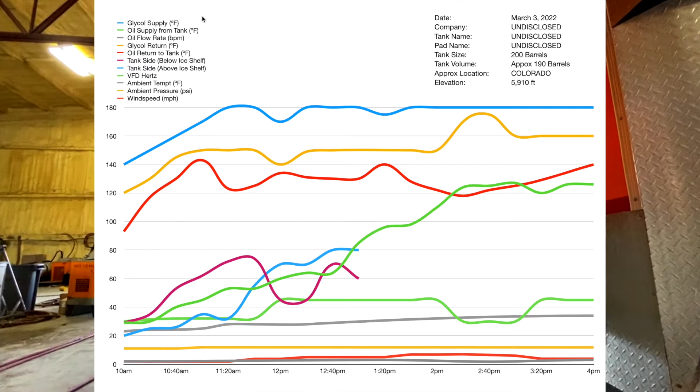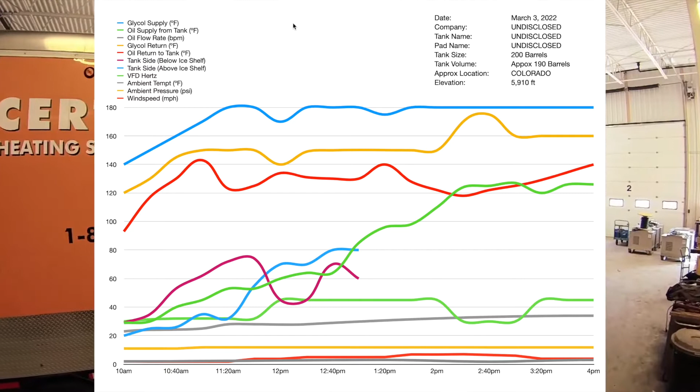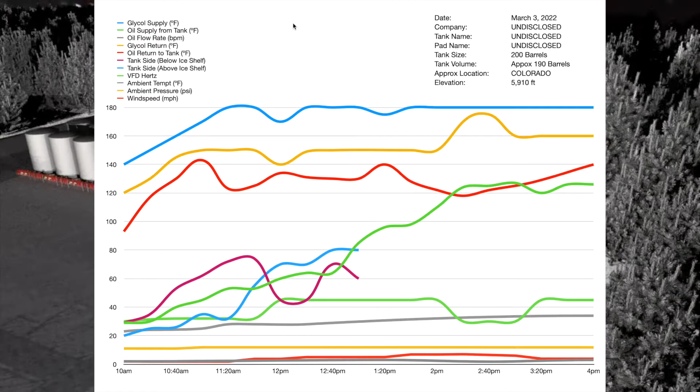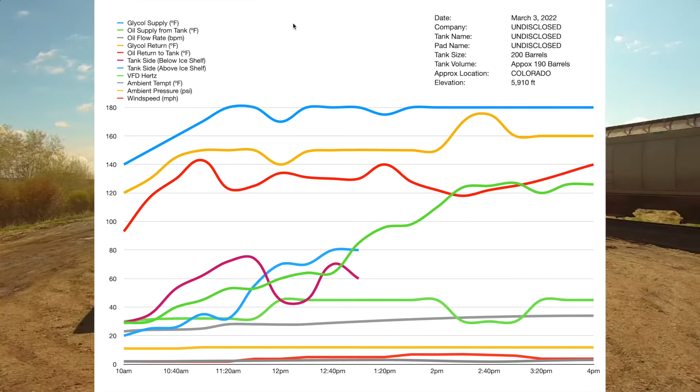This is a graph of one of our more recent hot oiling jobs we performed for a customer. Hot oiling is not what you think—we don't have hot oilers. We have glycol hydronic heaters, much safer, much more efficient. We call this process hot oiling because customers bring us in all around the country and in Canada to heat oil to do one of several things: thin it out, release gases, separate particulates from it, sometimes just getting rid of ice shelves caught in the bottom of these tanks—all associated with getting it to market so they can fetch a higher price.

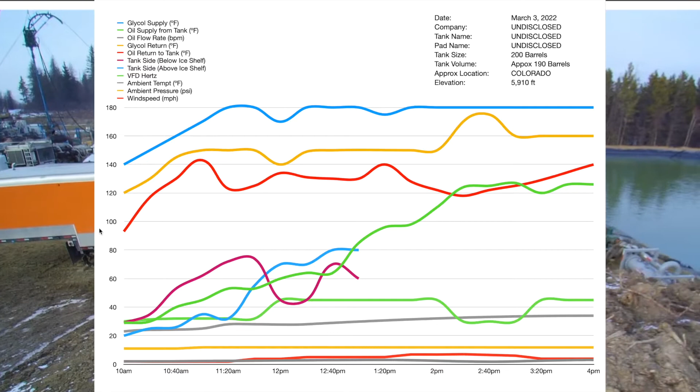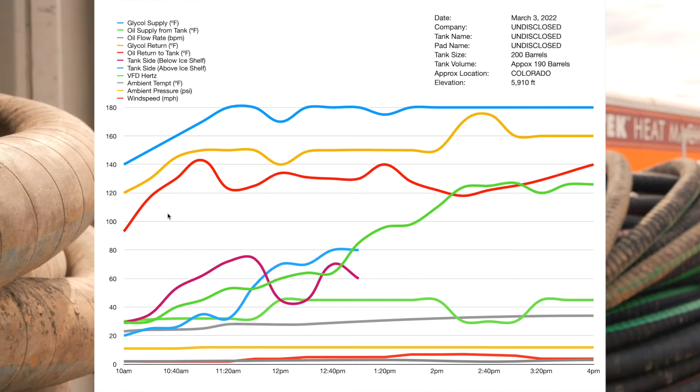Now this is something that we provide to all of our customers. This is just a graph of how our heating goes, and this doesn't necessarily help them with the sale, but a lot of times the pumpers and supervisors like to see this data so they can better schedule and see how our process works, and we like it too. This helps us determine if we're at high altitude, if the wind is going to be heavy, if it's going to be cold. All that affects your ability to heat exchange and how fast it's going to go, so you can schedule accordingly.

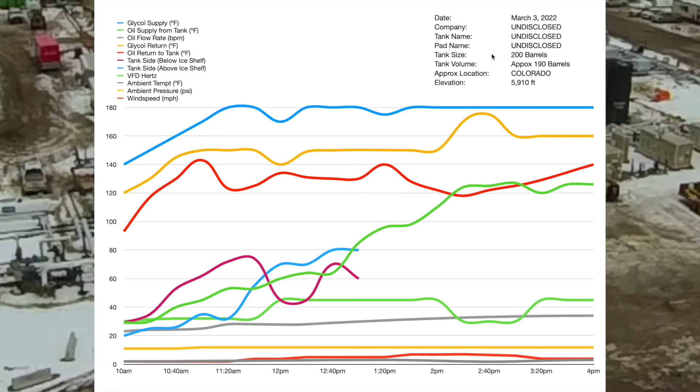So we're looking at this, and since we supply this to our customers, it struck me that maybe I should put these online and let others see how this goes. Of course, you're not going to see who this was for, or the tank name, or any of that. This was a 200 barrel tank, pretty much full. This was in Colorado, almost at 6,000 feet.

A lot of these will look a lot cleaner—this one's a little anomalous, and we'll get into why that is. But the most important thing you're always looking at when heating a tank is this: where is the oil supply from tank. So I'll go over these real quick.

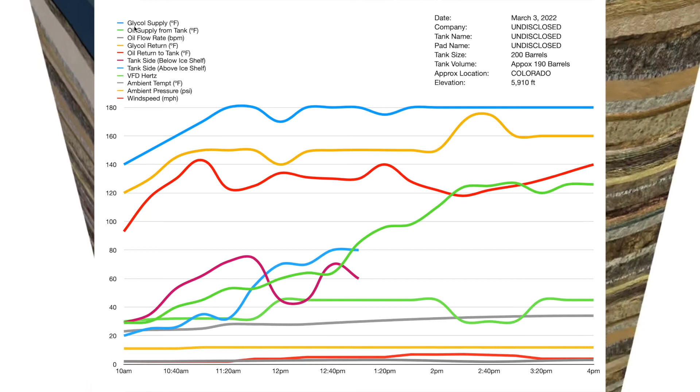What we're looking at is we use a heat exchange process. We use propylene glycol, food grade glycol—you could drink the stuff, tastes terrible, don't recommend it. So glycol supply, that's the glycol as it's coming out of our system. Our system, we like to top it out right around 180 degrees. So when you're running full bore, you're going to be right around 180. You're going to watch for this line right here.

Oil supply from the tank—that's the oil as you're getting it from the tank. Of course, as it starts out, it's going to be very cold, typically below the freezing point of water, though oil is still liquid at that point. That's actually the main one to watch, because we'll also look at our oil supply or return to the tank, which is coming right out of our system and will be hot. But you want to see this oil supply from the tank, because when that starts being hot, then you know you are reaching the temperatures you want in the tank.

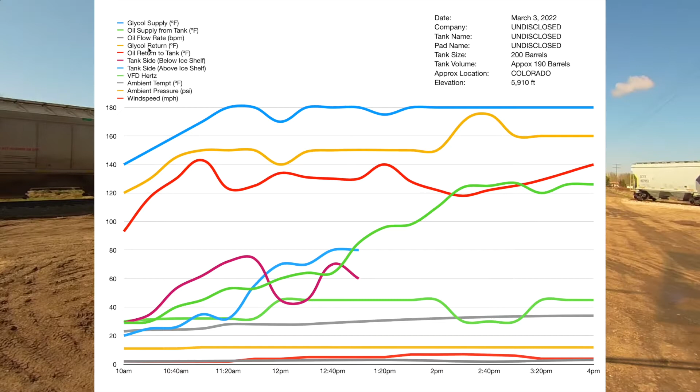Oil flow rate, that's basically how fast we're moving it through our heat exchanger. Usually we go up to about 4 barrels a minute topping out, but we don't usually need to run it that fast. Glycol return, that's our glycol supply imparting heat to the oil, and we're measuring what it's returning back at. Oil return to the tank, that's the oil we've just heated seconds ago, and it's going into the tank at what temperature.

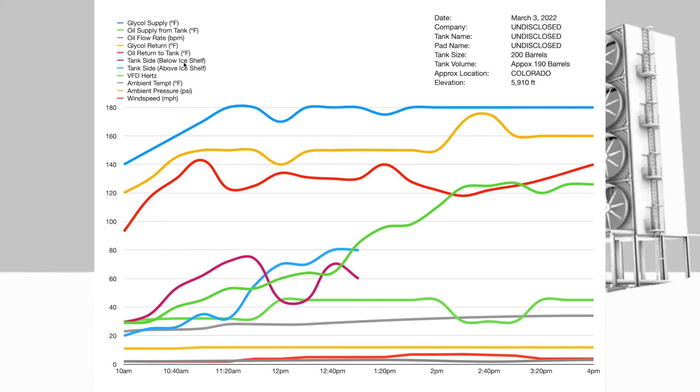Tank side, that's something new on this chart—we haven't really been charting that up till this point. That's a little crazy, and it's because there was an ice shelf. So we're actually trying to measure and gauge below this ice shelf, which is where our oil is going, because that's where the return valve is. Above this ice shelf creates a barrier, so if you can't get through that ice shelf of water, you're going to be reading two different temperatures. That's why we're measuring that.

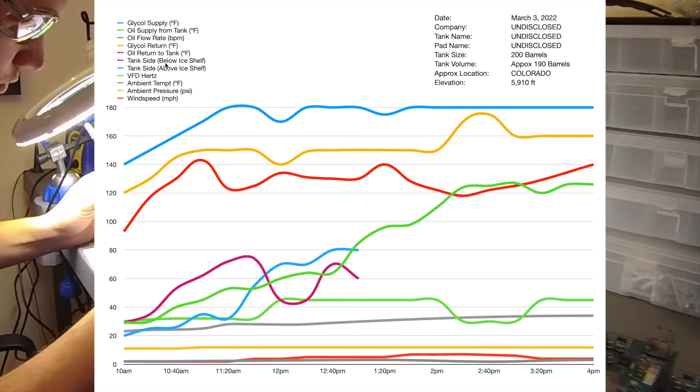VFD hertz. That's just a VFD that controls our pump through a heat exchanger, so that correlates to our flow rate.

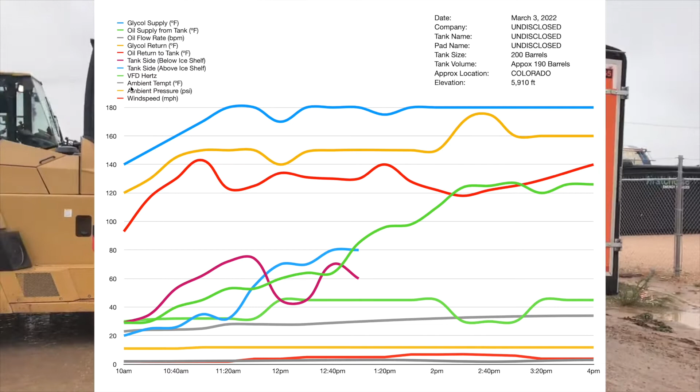Ambient temperature outside. These tanks are insulated, though I don't know the R value of the insulation off hand, that's something I should find out from our clients. Ambient temperature, if it's really cold, might affect it, but it's just something we like to gauge, especially if it's been warm out, like heating in the summer, which we often do, it takes less time and less energy. If it's winter and you're starting out below 20 degrees, it takes a bit more time.

Ambient pressure affects our unit since we're dealing with liquids and heat. We're at about 6,000 feet, so not too high. We run this office in Grand Junction, Colorado, which is about 4,500 feet anyway. And then wind speed, again with an insulated tank it doesn't affect it too much, but it's something we like to track.

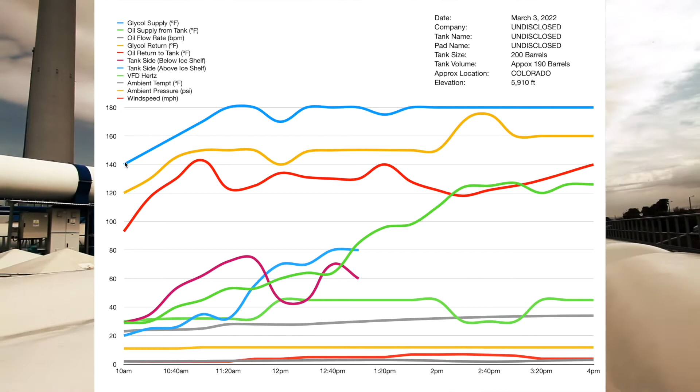So, starting out, glycol supply. So you're seeing it, we're starting. We already have this unit prepped and heating before we set up and before we really break circulation. So we're at 140. Now, of course, if you're starting the heater cold, it's going to be a lot less than that, but we're starting at 140 by the time we hook into this tank.

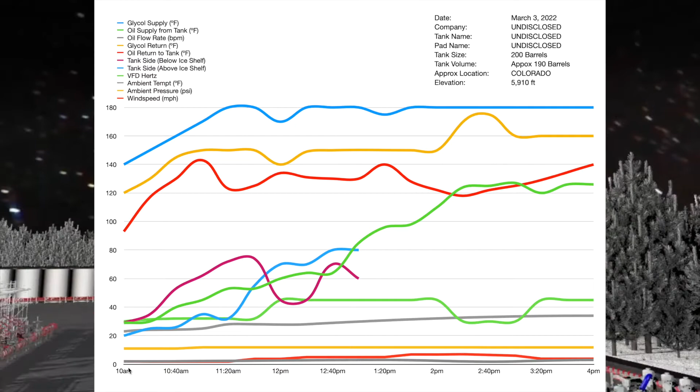You can see we're measuring at 20-minute increments. This went from about 10 to 4, a little longer than we had expected, because originally we were just going to get this tank up to 90 degrees. You can see it gets a little funky right around here - that's because when the pumper came and checked it, we got to that temperature.

So here's the oil supply, you can see it's climbing with the glycol. Now right around here is when I think we had this ice shelf that we were dealing with fall, and so it fell into our oil. We see a little bit of a dip right there, but then it starts climbing again.

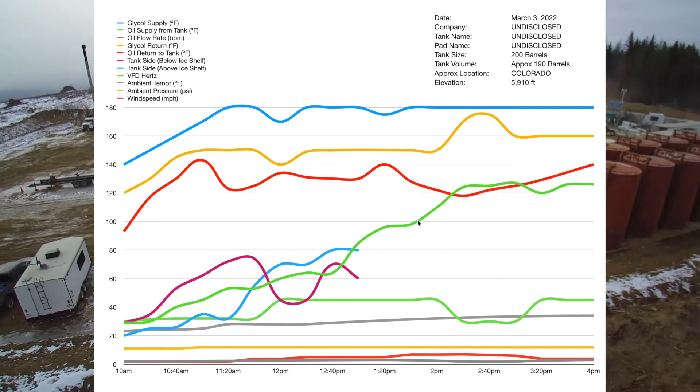We wanted to get to 90 degrees, so we're right here and we're holding. We were probably about to shut down, but we've got the pumper coming and checking. They liked the temperature, but this is when they hadn't been using this tank quite a bit, so he wasn't that familiar with it. When he took a look at it, there was just tons of scaling from the bottom of the tank, lots of sludge, so he asked if we would pump it up to 125, which you can see.

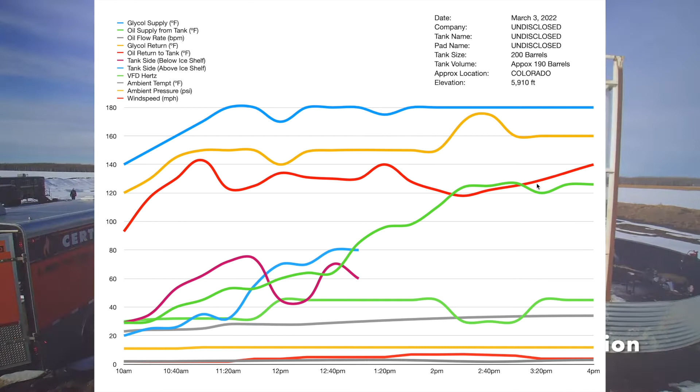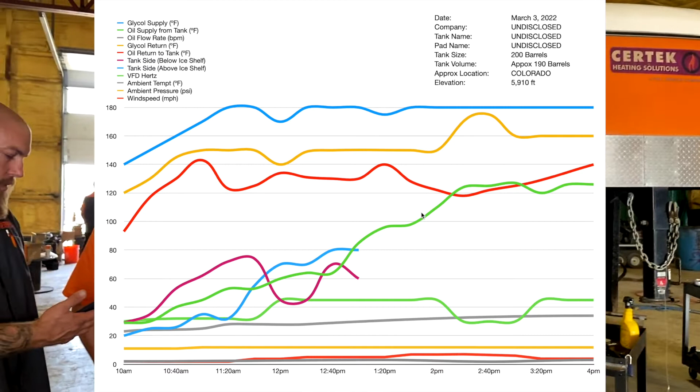So we stayed and did that, and he also asked if we could switch the load and return hoses, because their load valve was ending up getting filled with a lot of that scaling, as it was all kind of getting sucked to that one spot. So we switched that, and we'll get into that in a second. That's where you can see our VFD drop, and we brought it back because we shut our system down for that process.

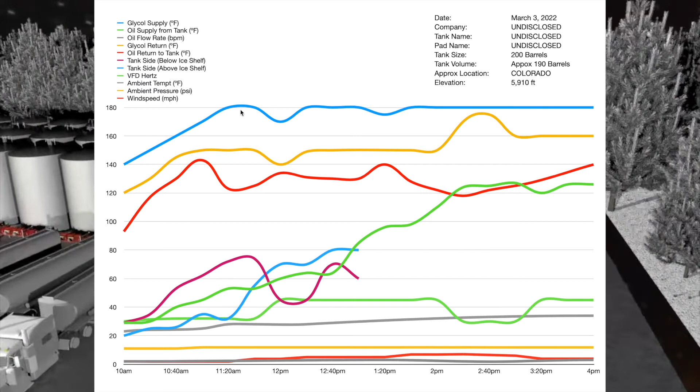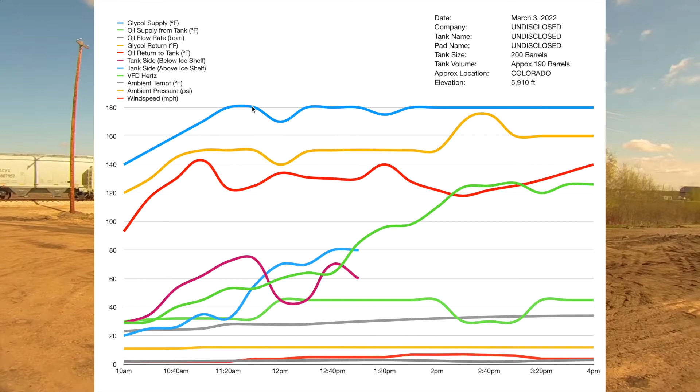So this is going, I want to help you understand these dips right here. Our glycol's getting up to temperature, hits 180, hits high fire temp. Now we have an automatic thermostat on it, so you can set that to whatever you want, but we've got it set to our highest at 180. When it hits that, it hangs out there for a while and actually turns off. So you see this little dip, goes down to maybe 170 at this point, and then it comes back on, goes back to 180, sits for a while, dips, back to 180, and sits there for a while.

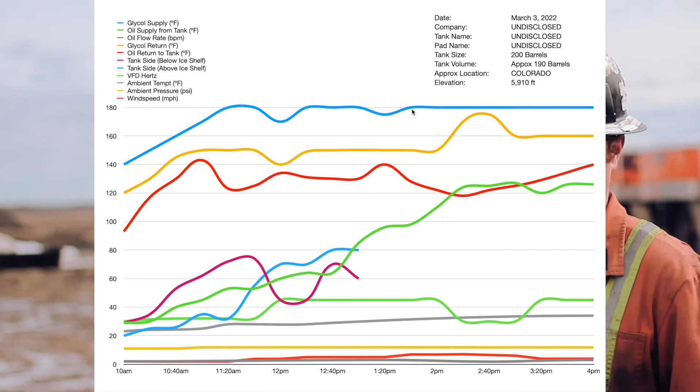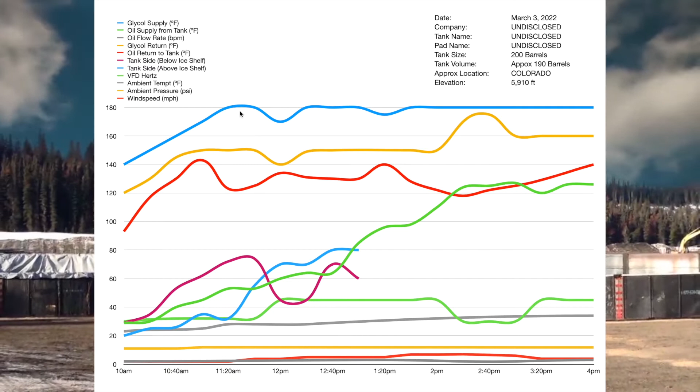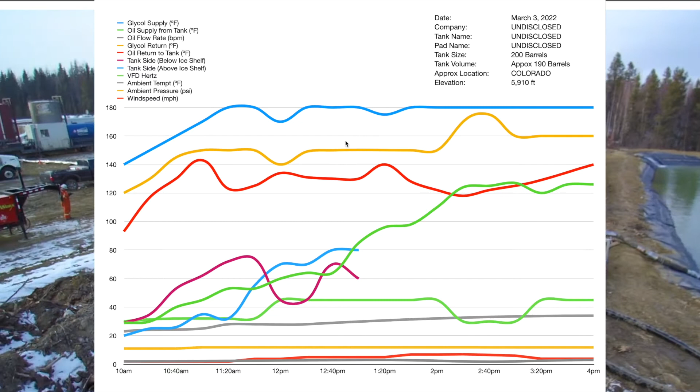Now that is really just how our system works - you set it, they're designed to set it and forget it. So for these processes, because they're only a few hours long, we do have a technician on hand the whole time. But when we're doing heat trace, things like that, where they're going to sit for months, you can set these and forget them. As long as they're fueled up and you're taking care of the generator and stuff, they just run, and they'll do this all day and keep you thawed out.

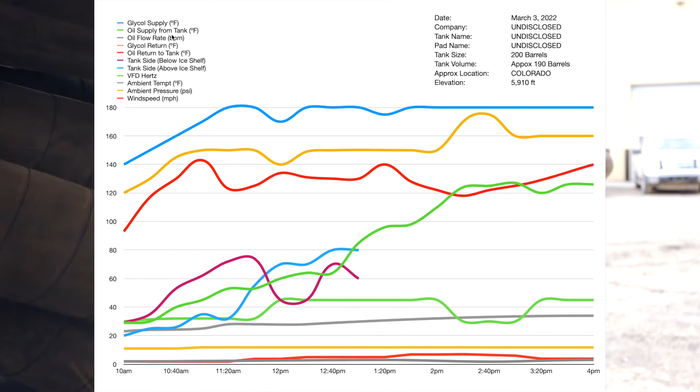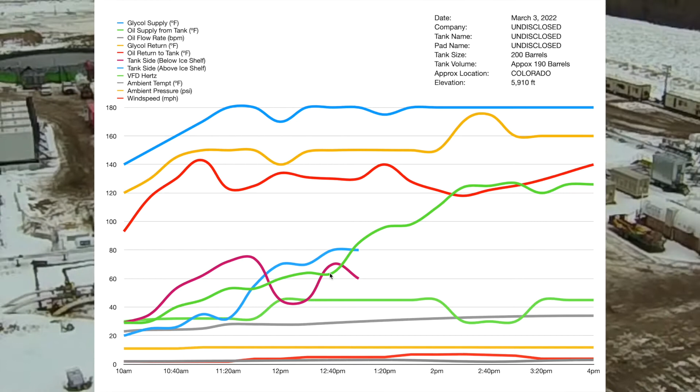Next, oil supply from the tank. We kind of talked about that a little bit. So we're starting out pretty cold, maybe right around freezing, 30 degrees. But quickly we start climbing. Sometimes it doesn't climb that quickly. Here's where I think we hit that ice shelf. I think it dumped in, so we got some of that cold water with it for a little bit, where we dip down a little. But then we just start climbing again.

You can see our glycol supply is pretty much staying constant right here, but we're still just climbing as we're adding heat. And then we are topping this guy out right around where they're asking 125.

I think we got up to 127. Dips for a little bit here, not quite sure why it dips right there, but then we get right back to there. Sometimes you just get anomalous readings.

And that is really the most important line, because that's where when you consistently are getting oil from the tank at the temperature you want, you know you are circulating that entire tank and you're at where you're at.

Oil flow rate. Now that correlates, like I said, with the VFD hertz. So down here, I think this is it. This would be it. It's really smooth. We're just running at 2-3 barrels a minute. And that's really all you need.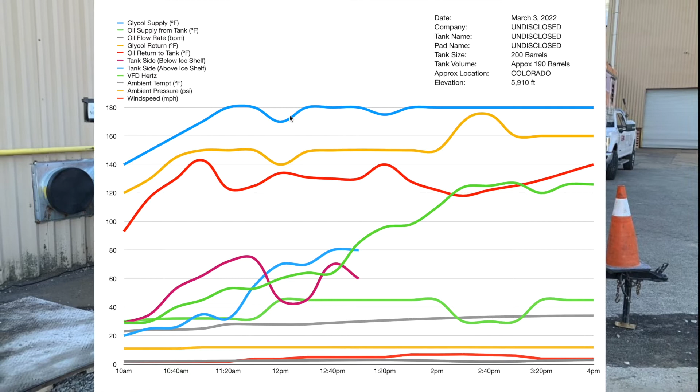Glycol return. Now that's this guy. So this is always going to be a little bit lower. So you always want to be, you don't want to be less than 170, because that's kind of that dip here on your glycol supply. If you're going lower than 170, it means maybe your unit's locked out, you need to turn it back on.

Or something like that. This, you don't really want to be less than, say, 130 while you're doing this. There's always going to be this little gap, and they kind of correlate as you see.

So this is climbing. So as we're imparting heat, we're losing that glycol heat and it's dropping down. So it's at 120 when we're starting. But it climbs as this climbs, climbing up to probably

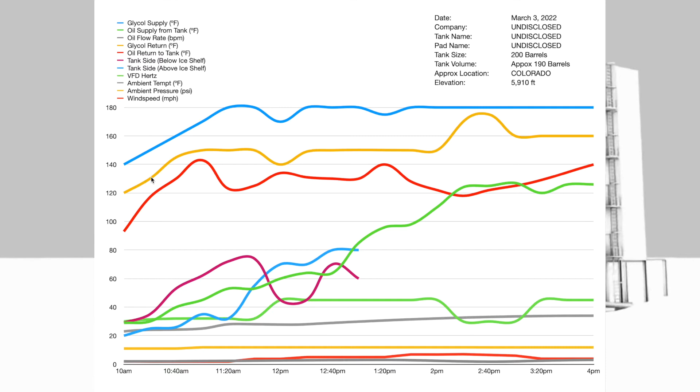150-ish here. As it turns off, it dips here. Don't notice much of a dip right here with that dip.

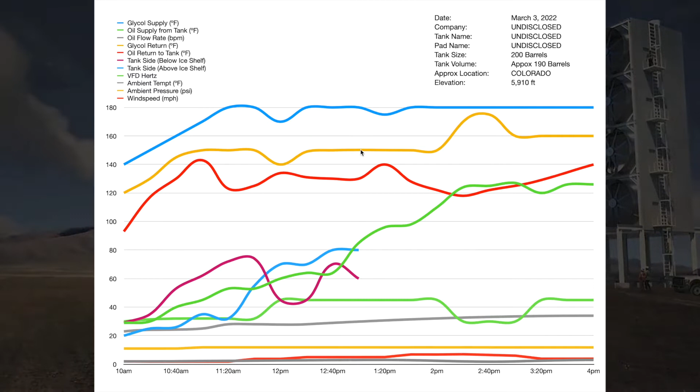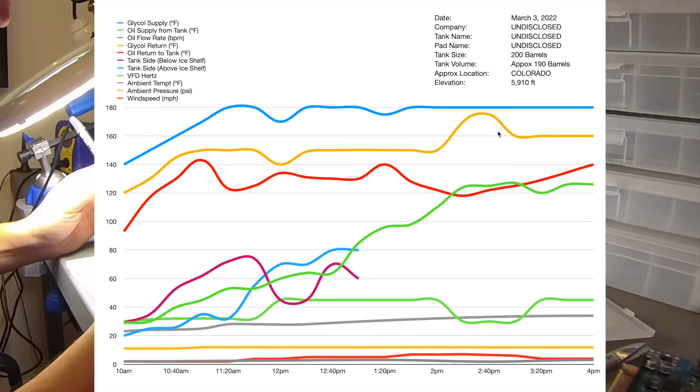And then it really climbs, and then you can see this is where your oil is not taking much more heat. So it is not...

This is in that zone where we had to switch everything out.

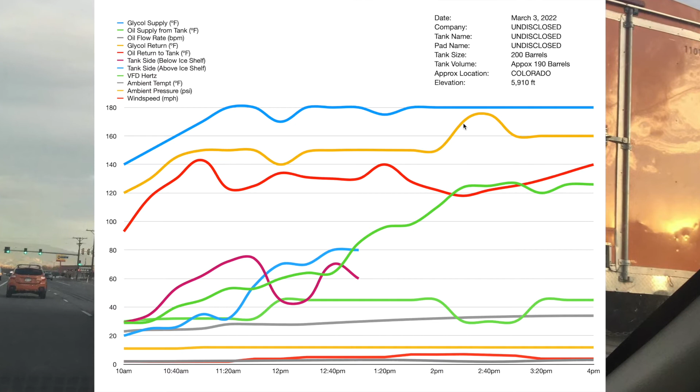So the return, it didn't lose much because there was no oil for it to impart it to. So it's approaching the supply heat. Then as we get it back, switched back, now you're seeing it's losing heat again as it's adding.

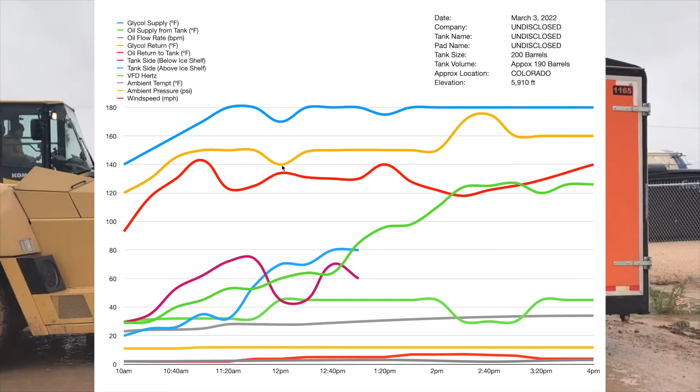Next, oil return to the tank. Now this spikes really quick and you can see it. That's because it's fresh out of the gate, out of our heat exchanger, back into the tank, and we're measuring it right at the valve when it enters the tank.

So yeah, it starts low, but it's actually pretty high. I mean, this is 90 degrees. So you can see, oil supply from the tank started at 30, and one trip through our heat exchanger, it's already up to about 90.

And then it's just climbing every time because it's getting hotter and hotter as it keeps returning through there. Goes up, dip here. This is where you're losing. These ice shelves aren't one thing. If you can imagine just kind of a ring of ice, or even like a plane of ice, different parts can be dumping off at different times.

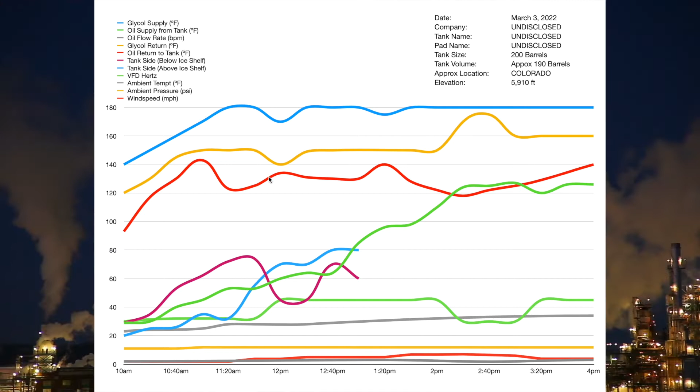So there's a little dip right here, goes up and up, and then you're turning, higher than your supply still.

And that's just going up. Now the sides of the tank.

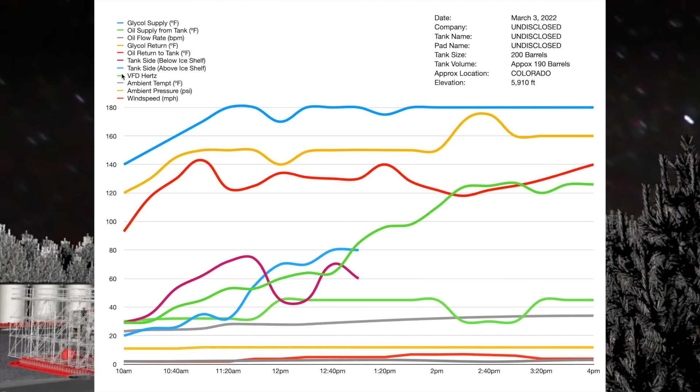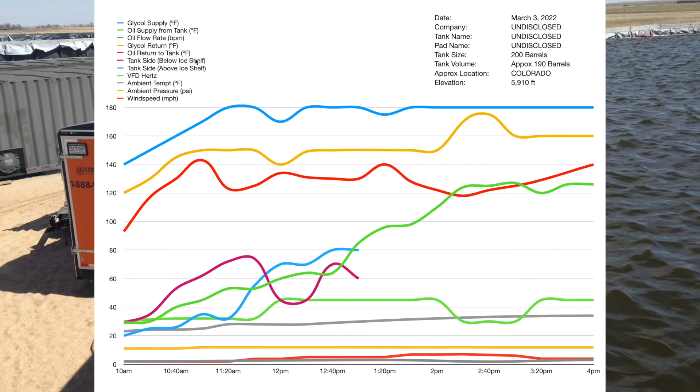Now these are the strange ones, and these are going to take a little more time to interpret. We're hitting where we think is below the ice shelf and above the ice shelf. Below the ice shelf should heat up really quickly because it's getting direct contact with the hot oil we're throwing in there. Above the ice shelf is on the other side of that barrier, so it's taken time to punch through that.

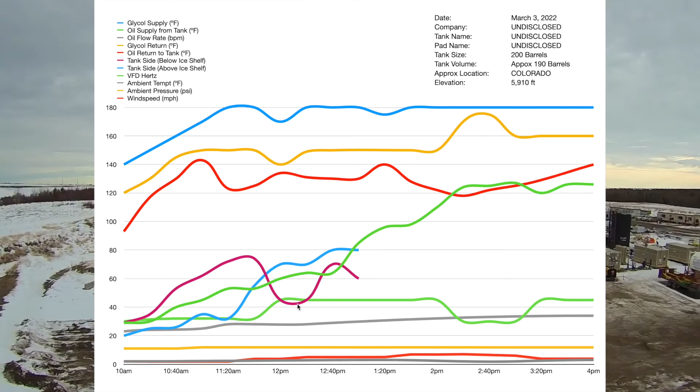You do see that in this chart, where immediately below that ice shelf it starts rising, mimicking all these up here, rising, kind of peaks. This is where I think part of that ice shelf dumped off and got down towards the bottom, and because that temperature dropped, and then it rises, and then as we got temperature on our supply, we stopped taking data points for that.

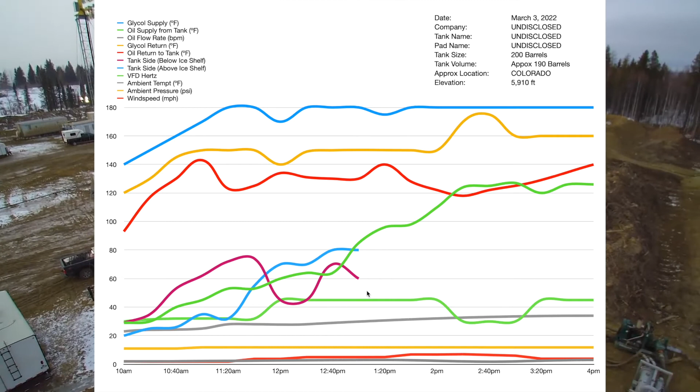So you can see above the ice shelf, it's a little colder. It is rising, but much slower. You're seeing it jump up and down, and then it actually crosses this and gets higher, and then we stop taking data points.

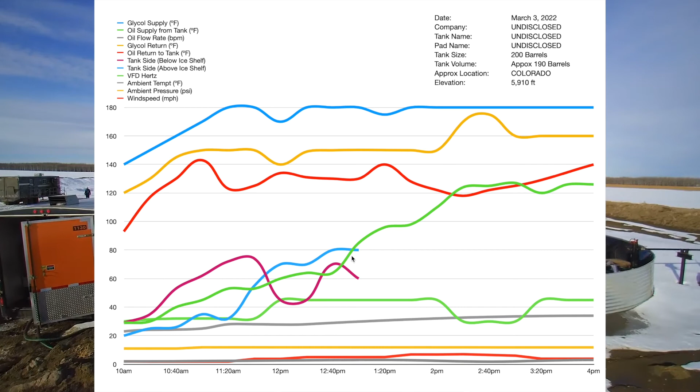With VFD, we kind of talked about that. That's just reading it in hertz, and for the ambient temperature, we didn't have much temperature change over the course of this job.

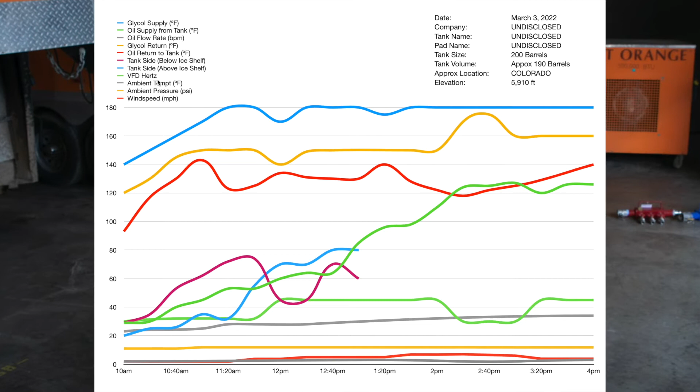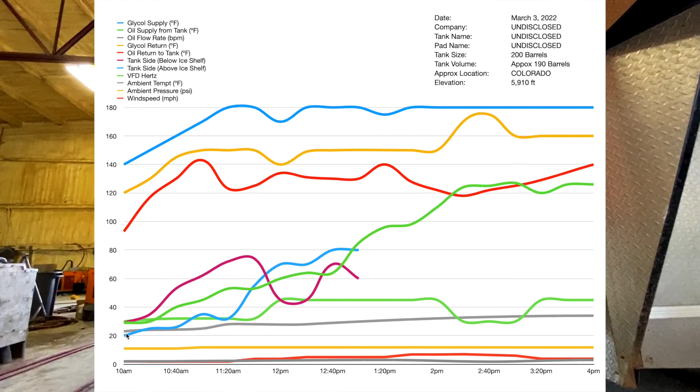Down here, this was the temperature. It was, I want to say, 25 degrees to start. You can see it's jumping up. It's just barely staying above freezing this whole time. Now this is early March in Colorado, so you're still pretty cold, especially at that elevation.

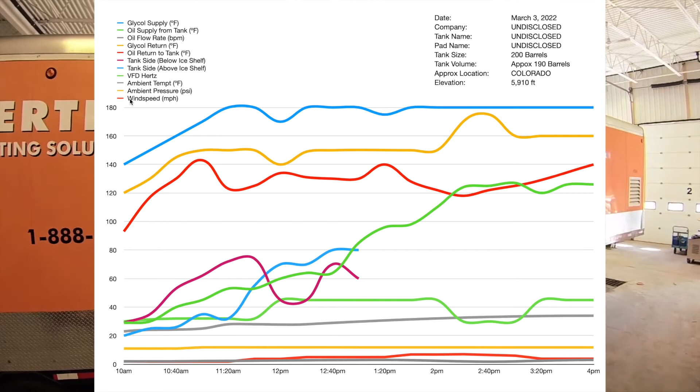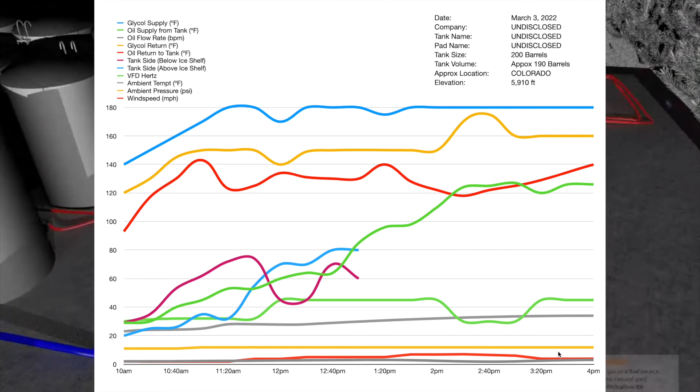Ambient pressure, we're about 11, 12 psi this entire time, so not much change there, and you can see that didn't really affect all these other numbers. And then we've got the wind speed, and that was really low.

I think it was 1-2 miles an hour, gets up to maybe 3, maybe 8 or 9 miles an hour, and then dips back down. So a little windy around 2 o'clock, and dips back down.

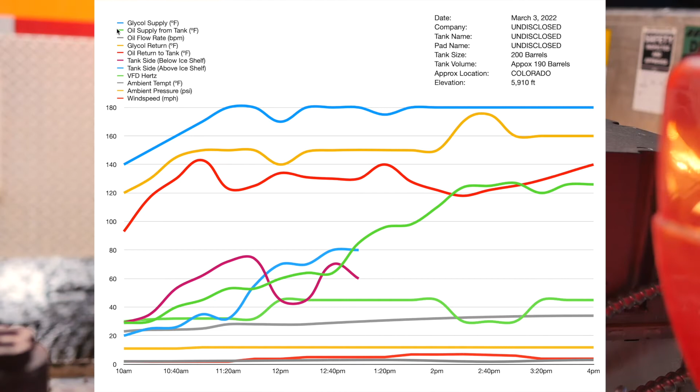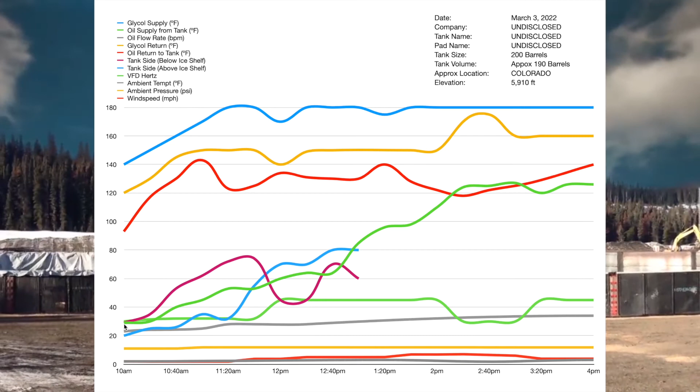So the main takeaway from this chart is basically to see how long this takes. So to get from where this oil is starting at, let's just say it's starting at 30 degrees, we hit 90, which is what our request was, and that looks like 4 hours.

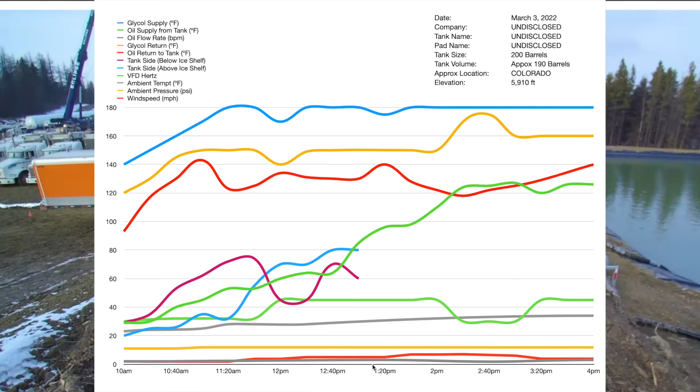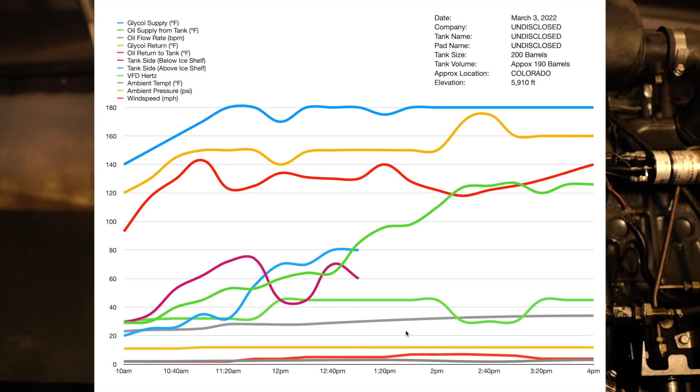And then to get to 125, and that was with shutting down for at least 20 minutes, half an hour while we're doing some things. What did I say, 4 hours, another really 5 hours. We just kind of kept it there for good measure.

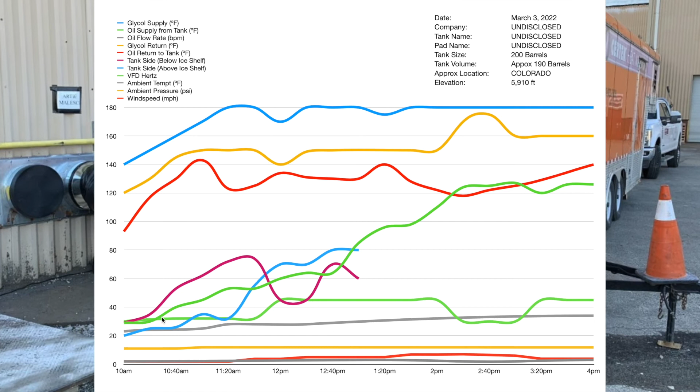And again, this supply is what you're looking at, and that's the key, what you want to get to. You want to keep these levels good, and that is basically, like I said, this was an anomalous tank.

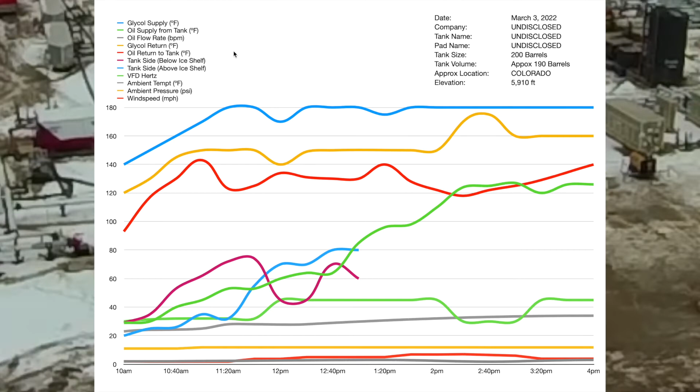Typically, they'll come and get these tanks the next day. They'll have a truck first thing in the morning, and so what I like to do is get one last data point from the pumper, and they'll measure what the temperature was when it was picked up.

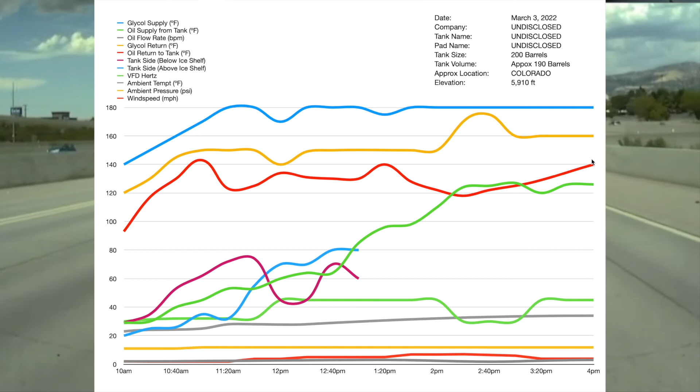And usually, if you're leaving the tank, say you're leaving it at noon at 120 degrees, which is typically your target rate, they're still picking it up the next day after a cold winter night at between 90 and 105 degrees Fahrenheit. This is all in Fahrenheit, and that is perfect for taking it to market.